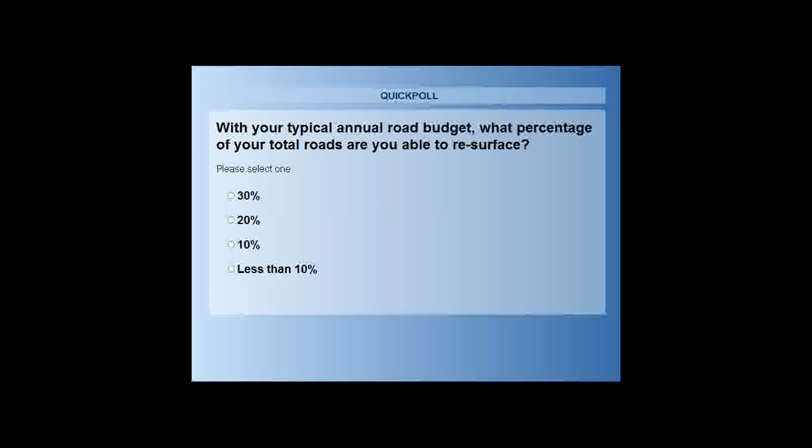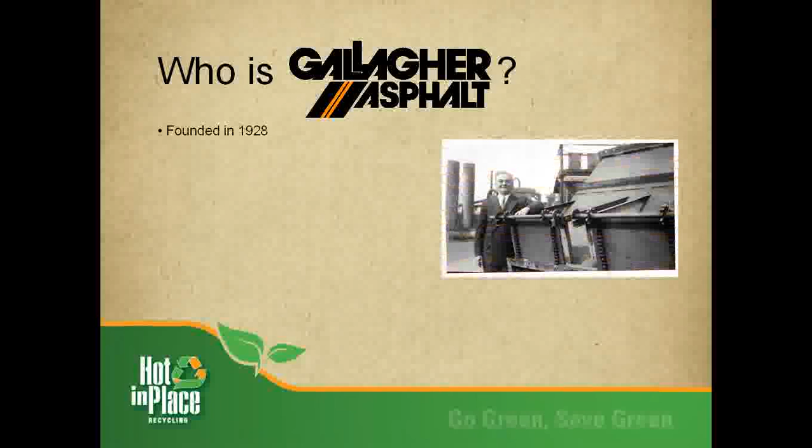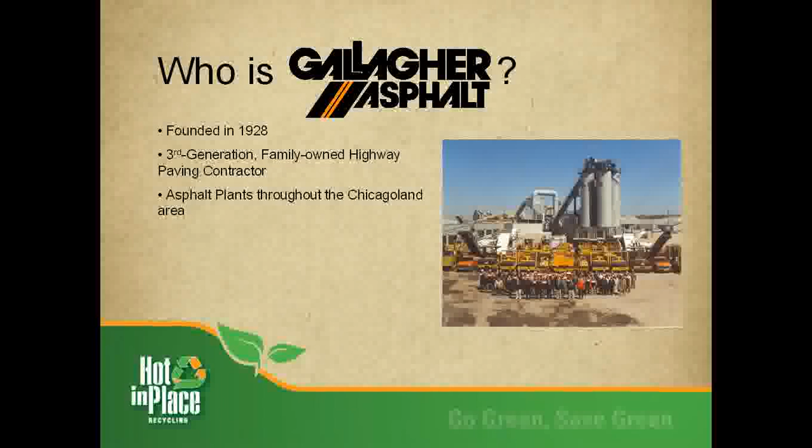Not to make this a commercial about Gallagher Asphalt, but I think it's important to know who someone's talking with, what kind of reference or background they have, so we'll keep this just a very brief part. Gallagher Asphalt in the Chicago area, where I'm speaking from, is one of the largest and oldest asphalt producers in the state of Illinois. We've been in business pushing 90 years, the third generation. There are some fun facts here, assuming you're all seeing this. There are some active organizations we're involved in, like NAPA and NCAT, Illinois Road Builders, and so on and so forth.

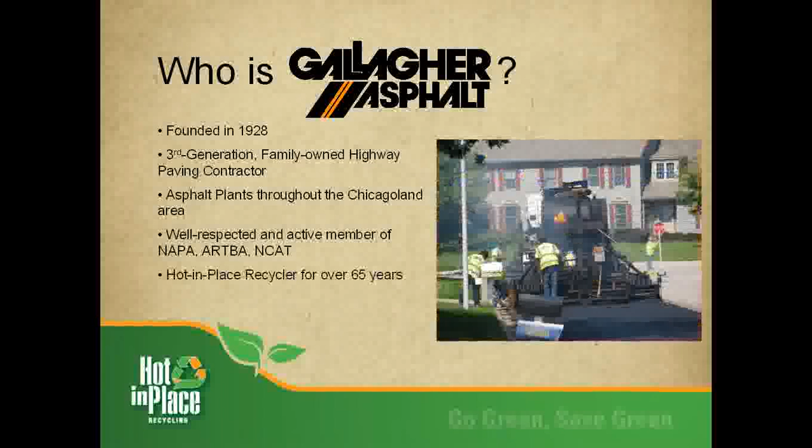The punchline I use when introducing myself or speaking to audiences is that we've been building roads for about 85 years and recycling them for about 65.

One other area I wanted to cover is one of our other divisions, Chicago Testing Labs, which in all likelihood is the oldest testing lab in the country, founded in 1912, and does full-line testing for highways, concrete, soils, and so on. These are all available on our website, along with the host of other Gallagher companies.

Randy mentioned that I was actively involved in ARRA, the Asphalt Recycling and Reclaiming Association. It's a couple hundred suppliers, contractors, and others involved in some discipline or area of recycling. It's a national organization headquartered out of Annapolis. I happen to be on the board of directors and vice president, and in a couple of months I'm about to be president of the organization.

What did Groucho Marx say? Any organization that would have me as vice president, I don't want anything to do with. But enough said there.

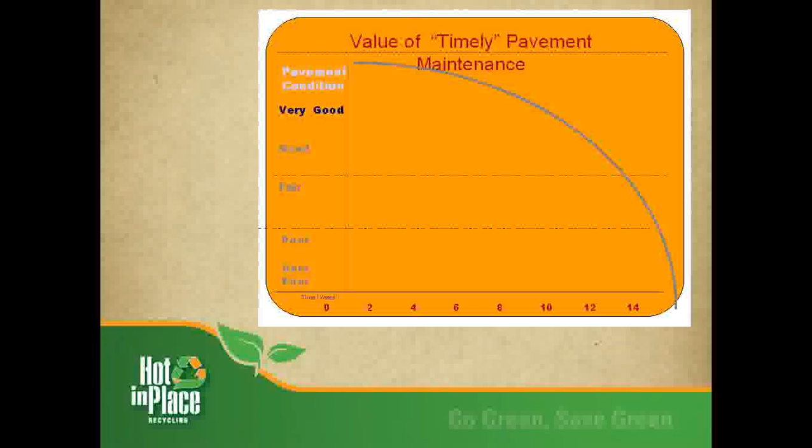One of the other lines I use all the time when I'm speaking directly to agency people is that you always have $100 worth of problems and about $65 to fix it. So you've got to be looking outside the box, looking for a different fix, and so on. This may well be suited for you. Ideally, from a textbook standpoint, where do you want to do hot in place recycling?

The textbook would say our BARM, which is a production from ARRA, our basic asphalt recycling manual, would say you want to start entertaining the thought of hot in place recycling somewhere in the 5, 6, 7, 8 year range. That's in perfect conditions with normal budgets and reasonable asphalt prices. I don't know the last time I worked on a 5, 6, 7, 8 year old asphalt road for hot in place. So in that regard, we continue to lower the bar, if you will. We are working on 9s and 10s and 11s and 12s, and we can do that.

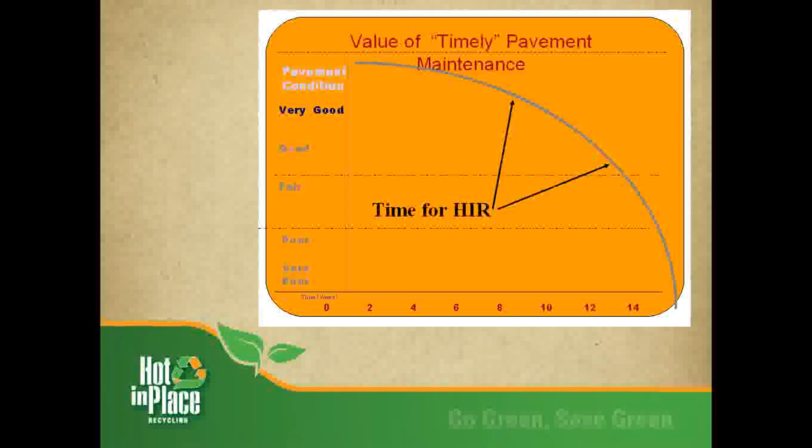I say we, I'm referring to good asphalt hot in place recycling contractors as well, not just Gallagher. You can look at an 8 or 9 or 10-year-old road depending on the customer's expectations. If we continue to lower the bar, there have to be some caveats about what those expectations are. That's very important to us as a contractor and obviously to the agency as well.

Let me run you a drill here real quick to show you on that reconstruction side what we have done historically, and then I'm going to move you through this time warp, if you will. There's a typical grind and overlay, and I think everybody has seen that and is aware of it, but let's run a quick drill here.

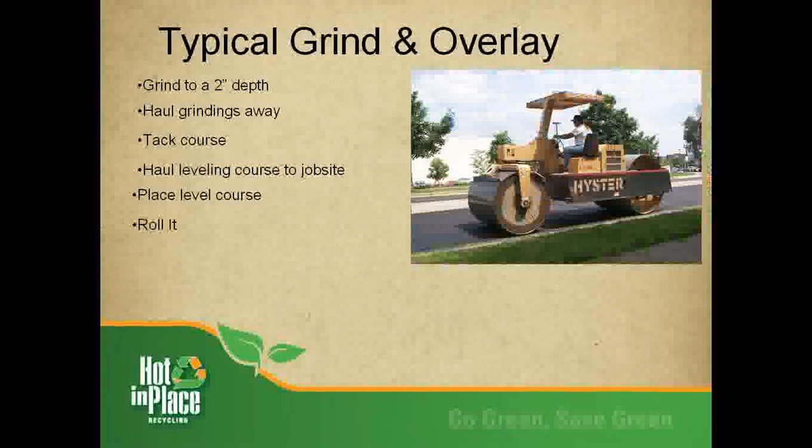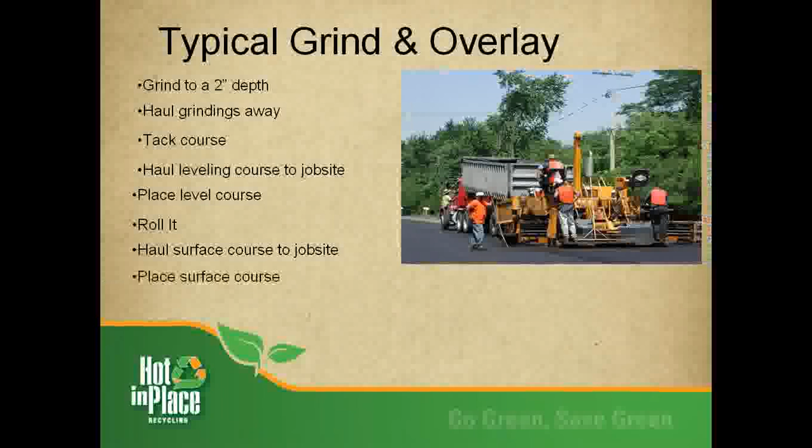I guess they have it at 2 inches here. So a typical 2-inch mill and fill is going to bring the grinder out in a whole bunch of trucks, haul all those grindings away, bring the tack course back after you've taken your 2 inches off, bring your leveling course back to the job site on trucks, place your leveling course - guess that would be more carbon footprint in there - put a roller on it, haul your surface course back to the job site, place that course, put a roller on it, put a stripe on it.

And it's done. If you pay attention, whether there's 2 people or 200 people out there, you'll find there's a little bit of humor laced through this whole thing. So I'll pause for a little laughter, although I can't hear it.

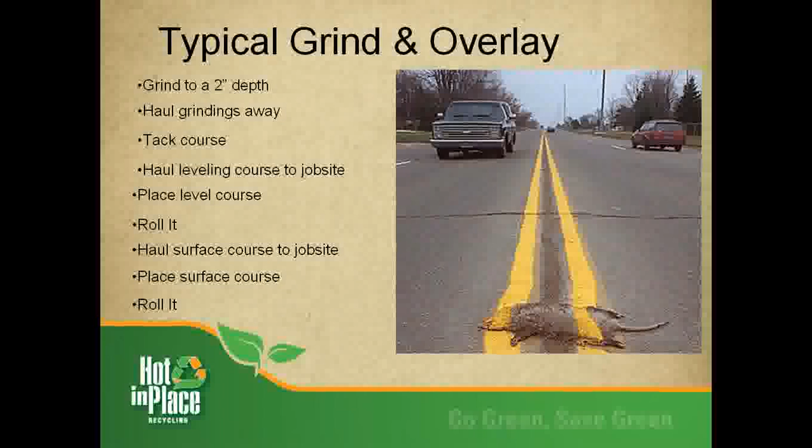That standard methodology, a mill and fill, has been around for a long time. It will be around for a good time longer. There comes a time in a roadway's life that it hasn't got the attention and it needs to be ground out and taken away. We've got a couple of choices here. Let's talk about the surface method, or heater scarification as it's referred to, and I'll compare that back to the mill and fill that we just saw.

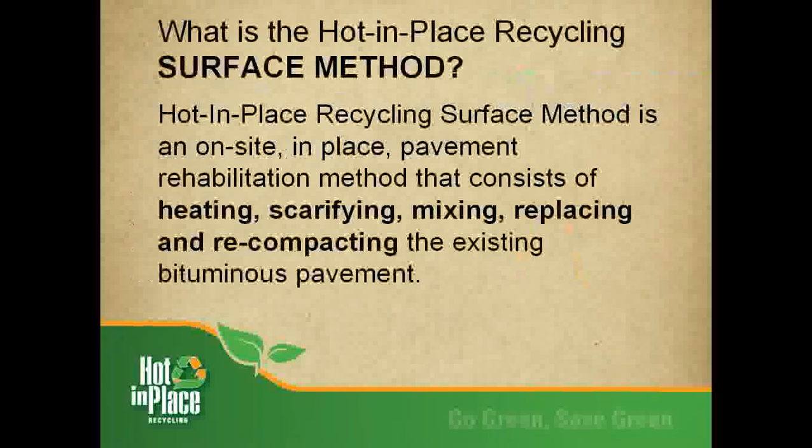I always heard that a good speaker should not read to his audience, so let me read this to you - actually, go ahead and read that yourself. It essentially says that instead of milling that pavement out, we are going to rehabilitate it in place and essentially make it a leveling course, make it ready to receive a new surface course. That's how we're going to do it here.

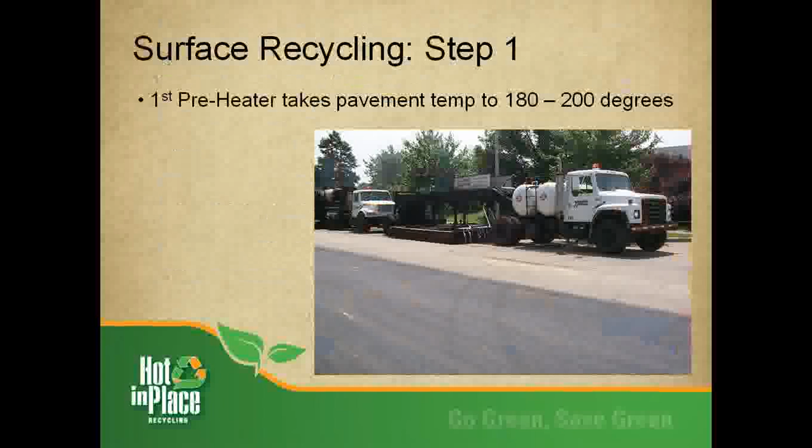The first unit is a refractory lined, propane-fired oven, and that's all it is - it's just going down the road somewhere in the vicinity of 8 to 15 foot a minute, slowly reheating the pavement. That first oven is going to take it up, as it says in the top banner, to 180 or 200 degrees. The second oven is just a duplicate of the first one. We'll take that pavement temperature now up around 300, henceforth which it came, if you will.

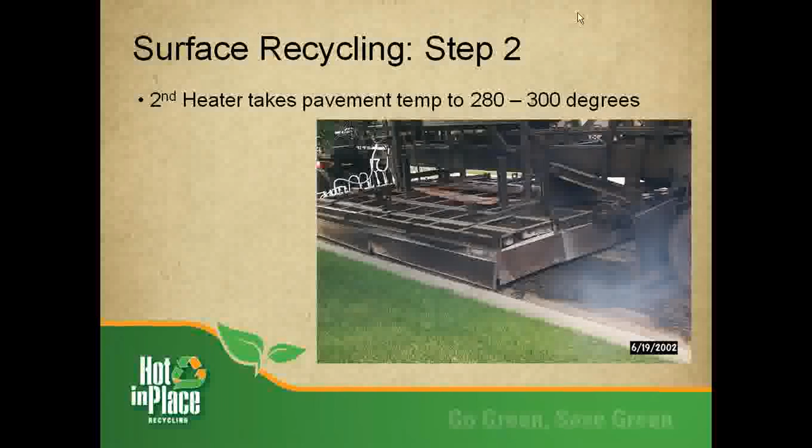300 degrees is the temperature that this material showed up as virgin asphalt when it was placed originally some years back. We've got 300 degree pavement. We are going to introduce the particular rejuvenating agent, which may vary from contractor to contractor, but we are going to introduce rejuvenating agent to the pavement.

This pavement has two problems. The two single largest problems that your pavement has is the lack of AC, or the UV rays have cooked the liquid out of this pavement and made it less flexible or brittle.

So several years into it, as this AC cooks off, you start to see some reflective cracking. And if reflective cracks are not attended to, they become more severe. The pavement essentially then opens itself up.

It opens itself up to take on moisture, and at the same time is losing some of the fines, which are very much a part of the matrix, or part of the mix that holds that matrix together of sand and various size aggregates. The fines and the oil all come together to give you your density in your asphalt pavement. When those fines start coming out, that's typically the beginning of the end.

Look at a 5 or 6 or 7-year-old road. Look over if it has a curb and gutter. Look what's laying in the pan. You see the fines laying in the pan, and that's not where they belong. They belong on the roadway. So those are the two most serious violations that happen over time to that pavement.

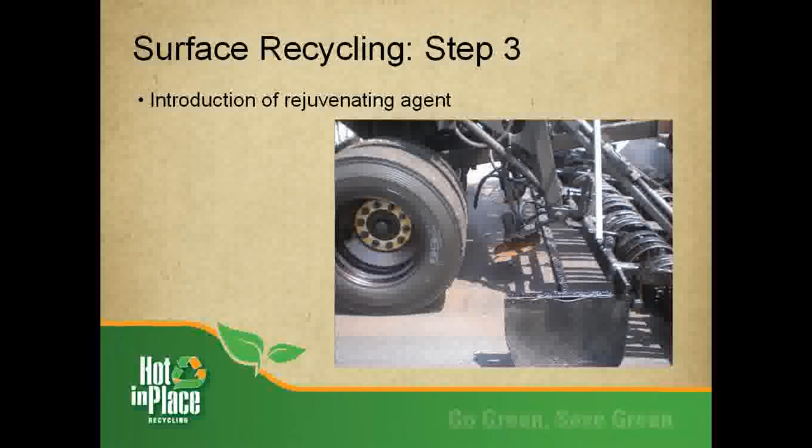We use, in this case, a polymer-modified rejuvenating agent, which my own lab people tell me will, in fact, make up for some percentage of the loss of those fines. We've already identified that we're putting the liquid back in it. We're using the polymer modification to offset some of the loss of fines.

In this particular operation, we are going to put a set of steel forks or flexible tines, after we have put that rejuvenating agent into the pavement, down into the pavement at a prescribed depth. He's in the up position here for the photo, but those typically can go into a pavement at up to around a 2-inch, and some jobs we've gotten 2 1/4 depth.

Typically, we're running at 1.5 inches. We've identified from a previous slide that this particular process is going to rejuvenate what's there. We're rejuvenating the roadway, making it ready to receive a new surface course.

So I just said a moment ago that we're typically working at 1.5 inches depth with these steel forks or tines. The reason that we do that is because the last lift typically put on the road was 1.5 inches deep. We don't want to mix the larger level or binder aggregate with the surface when we bring that to the top. We want a good steady mix. So if the last lift was 1.5 inches, that's where we're going to work.

If the last lift was 2 inches, that's where we're going to work. So we'll dictate that on every road that we look at, as any other hot-in-place contractor looks at, is different. You have to take everything on a case-by-case basis.

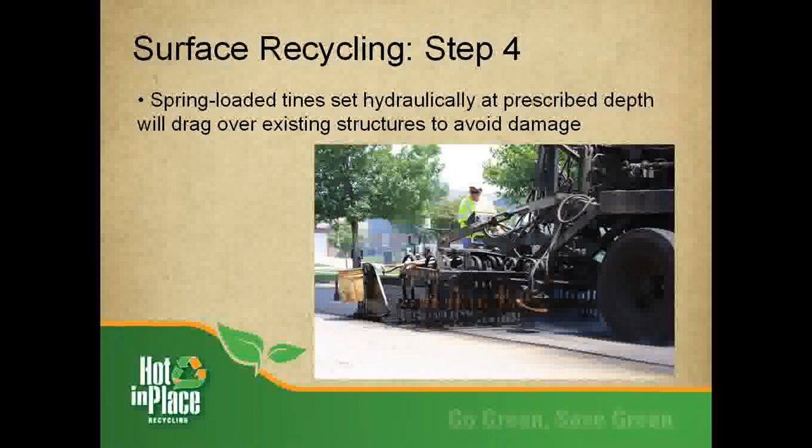A little bit of hand work, but nothing dramatic. We don't stop the operation. There's an auger right behind the tines, full-width augers, giving the roadway a good mix, making sure that oil's in it. We can do some limited profiling with the road.

If you've got too much crown, we can knock it out. If you want a little bit more crown, we can put it back. We're robbing Peter to pay Paul. The only material that we are introducing into this process is the liquid. So if you want more crown, we can do that, but we're going to take it from the shoulder, so you'll have to make it up on your finished pave.

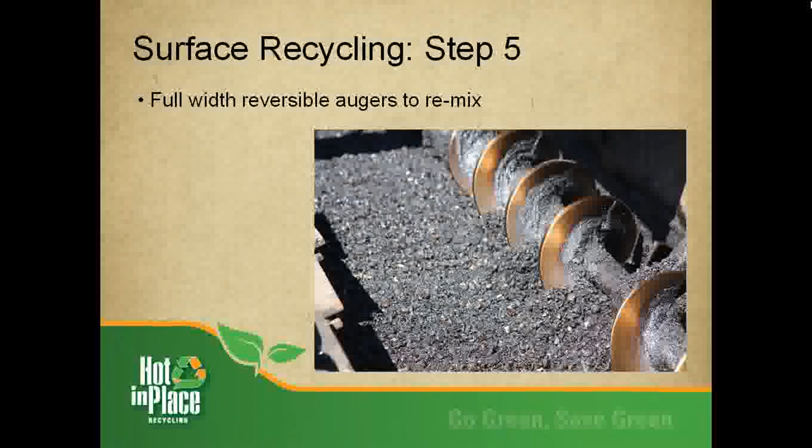Behind the mixers is a conventional paving screed. It's carrying a head of material down the road, as would a conventional paver at a job site. It's getting fed by 6-wheelers or semis, and redistributing the material the way it should be.

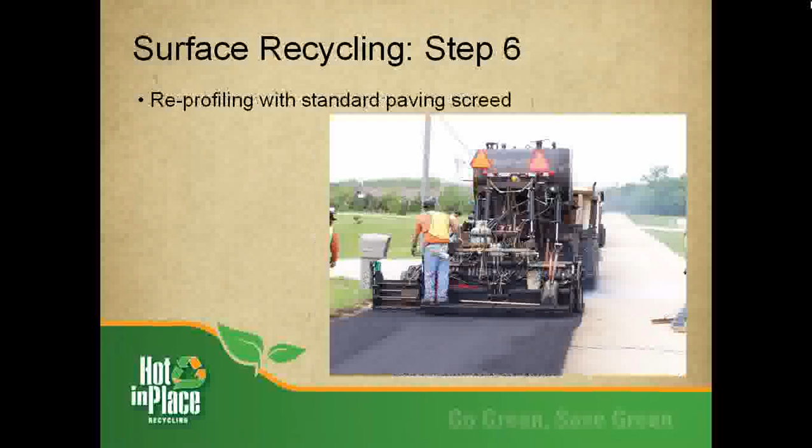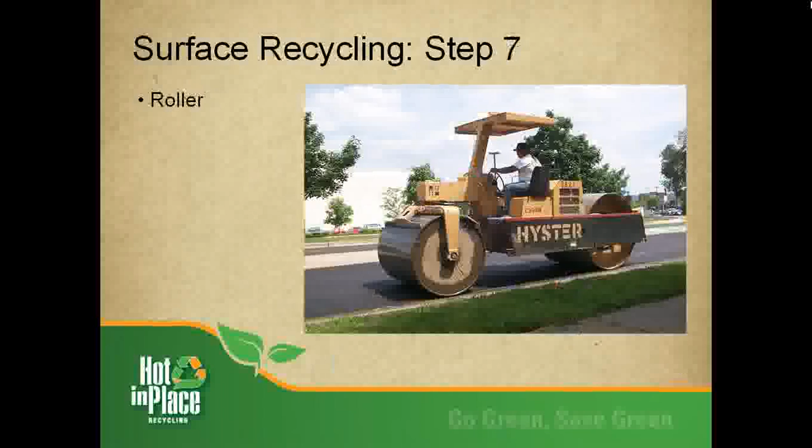Vibratory, heated, chased with a roller. When that roller passes a driveway, a business entrance, a residence, it's open to traffic. The project isn't done, with heater scarification, but the roadway is open to traffic. We're down now, one would have to assume, below 150 degrees where a roller shouldn't be on it.

So my point here is utilization of flaggers on this project will be lane restriction and not lane closure. That's a big deal. I'm going to show you some numbers later that justify the cost of hot in place over mill and fill, and that's without using user delays. If you threw user delays in there, it'd be astronomical. But we have minimal interruption to the motoring public. We don't have lane closure, just restriction, and that's appreciated by all.

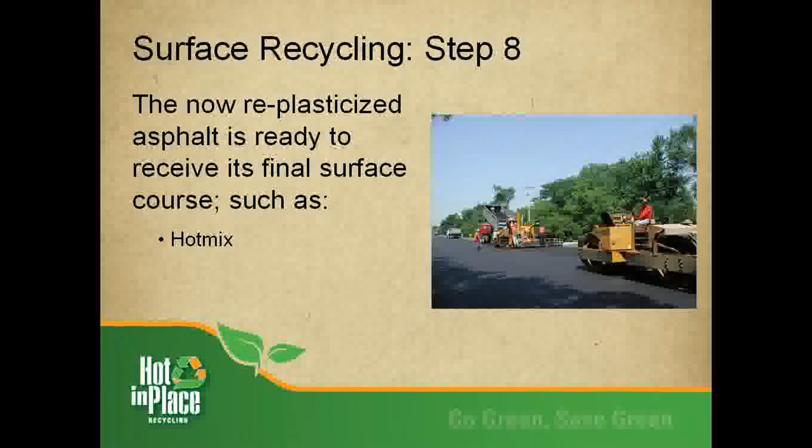We're finished with the hot in place recycling process, and now if it's here in the Midwest or in our backyard, we may well come out and do the surface course of the paving, or as we move around, we usually leave that to the local paver. Within the three technologies under the hot in place heading, there was another process called surface repaving, and that's a turnkey operation. They don't have another paver come in and do that. But anyhow, the hot in place recycled asphalt is now ready, in this case, to receive a new surface course.

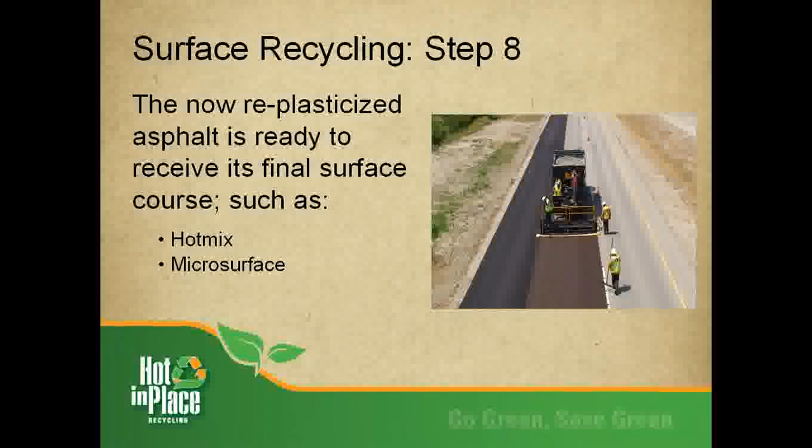If you remember that slide, where does it fit in? What we are seeing a lot more of, that is budgetary driven, is less expensive surface courses. Not everybody has the budget for a 1.5 or 2-inch overlay of hot mix. They may well go with a micro surface, a slurry surface. And that, I think, comes back to customer expectations.

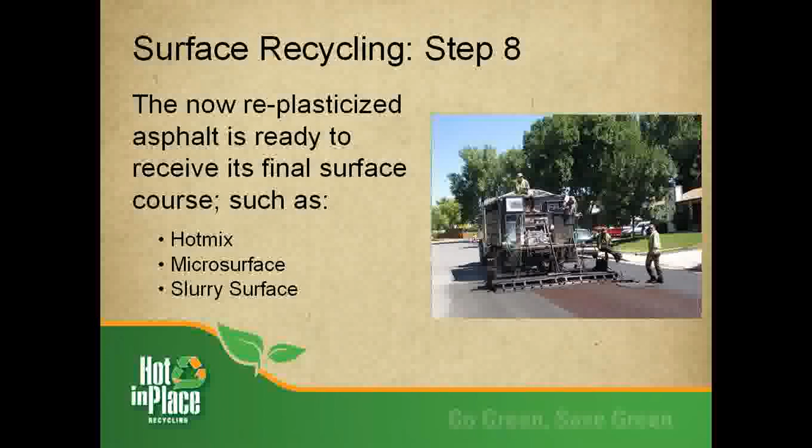What are you looking for? You're obviously not going to get the longevity out of these less expensive surface treatments than you would from a structurally introduced product like asphalt at 1.5 or 2 inches. But it may well fill your bill. It certainly will be bang for your dollar and get you to where you need to get to. And that's obviously going to depend from region to region as to what kind of life you get out of the less expensive option. But they are very much part of the ball game now. Make no mistake about that.

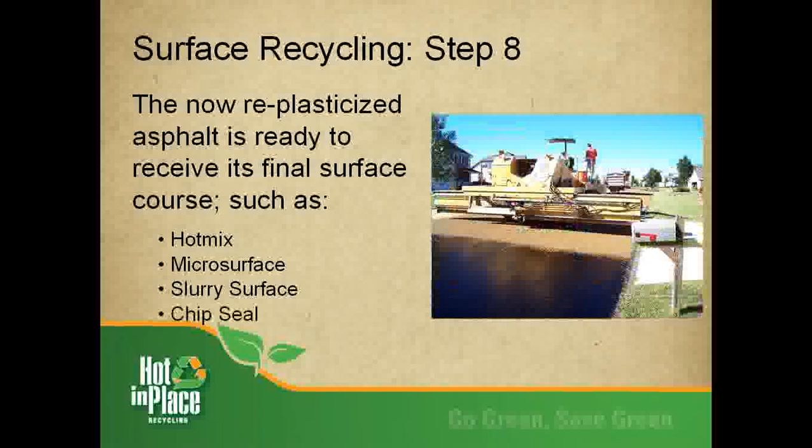Chip seal is kind of an old country thing. We see a lot more chip seal, it seems, every year after year. It's a good sell. Although minimal, it does have some structural value. But chip seal is moving downtown. We have worked for the city of St. Louis County, and they use a lot of chip seal right down on their main drags, main streets in town. It's quite a product if you get the right emulsion and the right rock.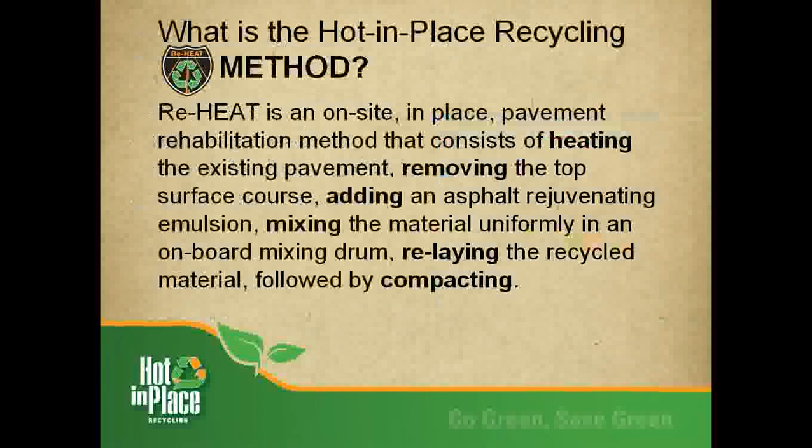For years, people have asked us, why does it have to be covered up? Because we think we're returning the road to a certain percentile. It's not a virgin mix design. There's things that happen to the road, and we feel better about it. I think there's longer life to be gained off the roadway on the heater scarification with the surface treatment.

This process, reheat, is going to retreat the road via heat, but will not, in fact, require a surface treatment of any sort. So this is where hot in place recycling has evolved to. We've been playing with the idea for a good number of years, and finally have gone ahead and put the equipment together that will do the job.

The basic difference—I don't have a lot of pictures in this PowerPoint—but the basic difference with this unit is we are picking the roadway up and putting it into a drum. The hot in place asphalt heater scarification recycling is in situ; that aggregate actually never comes off the roadway. This process will, in fact, with a moldboard, dial in at a prescribed depth of 1 inch, or 2, or 3, and perhaps beyond.

Since we're leaving a finished product, it's going to be dictated by the surface treatment that was last put out there. So if there was 1.5 or 2 inches, that's the depth this piece of equipment will work at. Rather than using the scarifiers or the tines, it'll have a preheater.

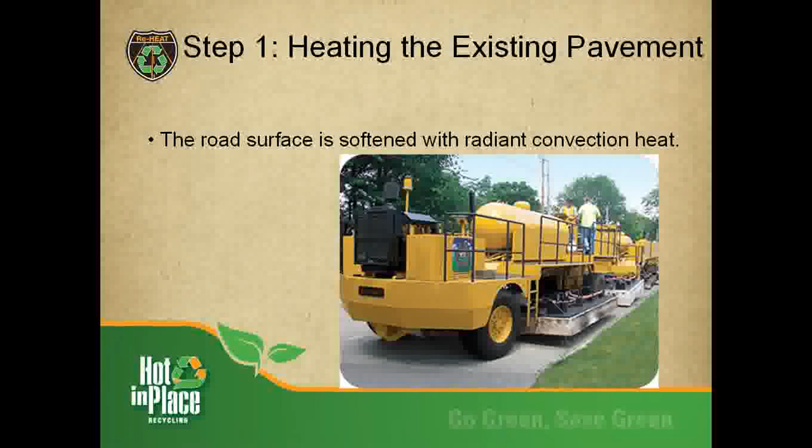I think that is beneficial - less carbon footprint, less equipment, less fuel, and giving us the heat that we need. So we have a preheater out in front, just a little different configuration, that essentially will take it up to that 180 or 200 degree level.

Pretty good picture of it there, I guess. I don't have a good picture of the drum. The preheater's out in front. Stay with me, Aaron, go ahead.

So anyhow, we've got the pavement that's softened, we've got 180 degrees. The process unit's going to come along - it has another oven unit on it that's going to take it to the next 275, 300. Again, we're at the temperature where this material showed up when it was virgin. At 300 degrees, we can start the process.

So I don't have the forks or the tines. I'm going to drop a moldboard or a blade down to that prescribed depth and feed this material into the mill, or a paddle wheel of sorts, that's going to take this into the mixing drum.

The mixing drum has heater elements. One of the issues, particularly early or later in the season, in the Great Lakes area, is heat loss. It doesn't take long - even in a standard paving operation, you all know it doesn't take long for the heat to come out of that pavement.

The mixing drum here is similar to what's going on in the plant outside the door behind me - it has a heat element, and that's where the oil goes. I didn't tell you before that the rejuvenating agent we were using is an emulsion. I apologize - we have gone to an oil here.

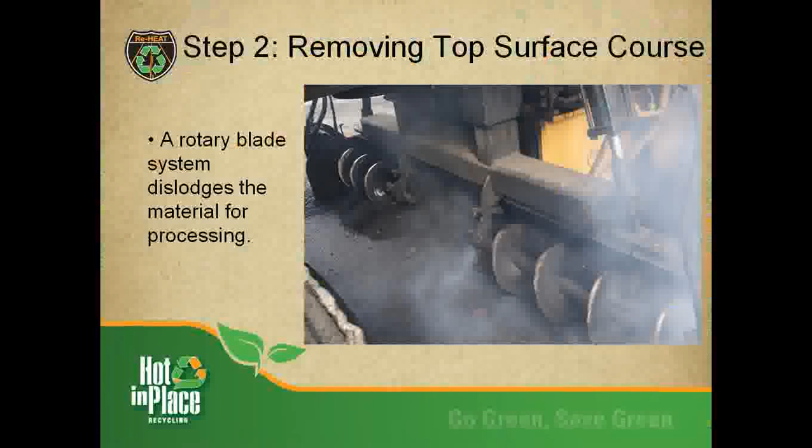So the oil is injected in the drum, the heating element goes on in the drum, and then it's going to come out in a windrow. There's some good pictures - it's going to come out in the windrow out the back side of the drum, that will get augered across the mat, and the paver right behind that.

I said I had limited pictures here. They get augered - the freshly rejuvenated material gets augered across the mat, and it gets fed to the paver, and the paver puts it down the same conventional method as if it were being fed by, again, a six-wheeler or semi.

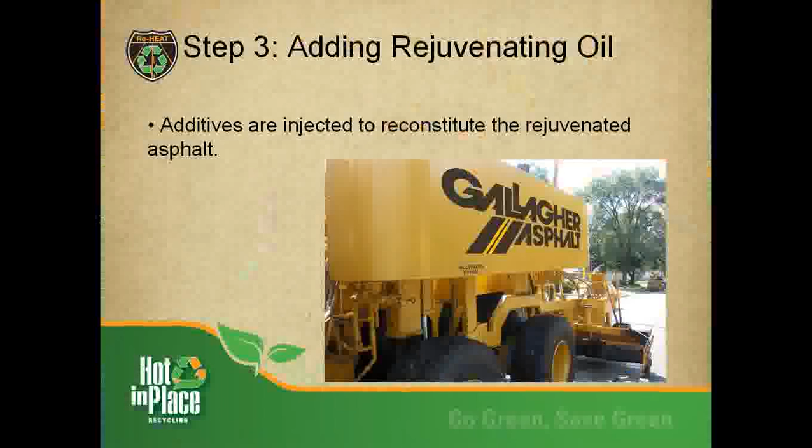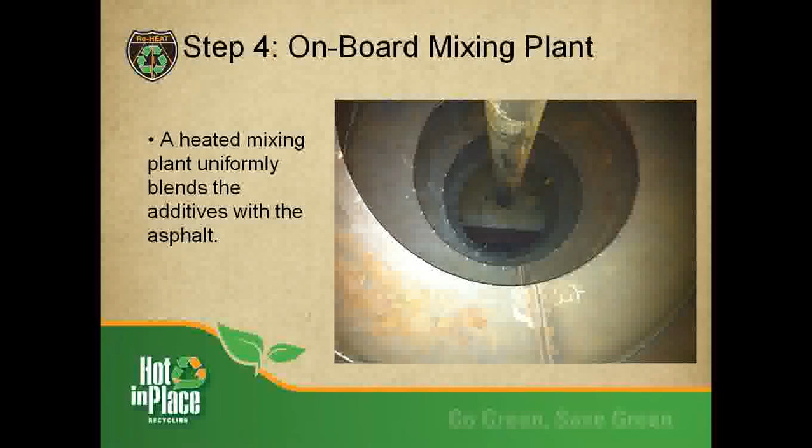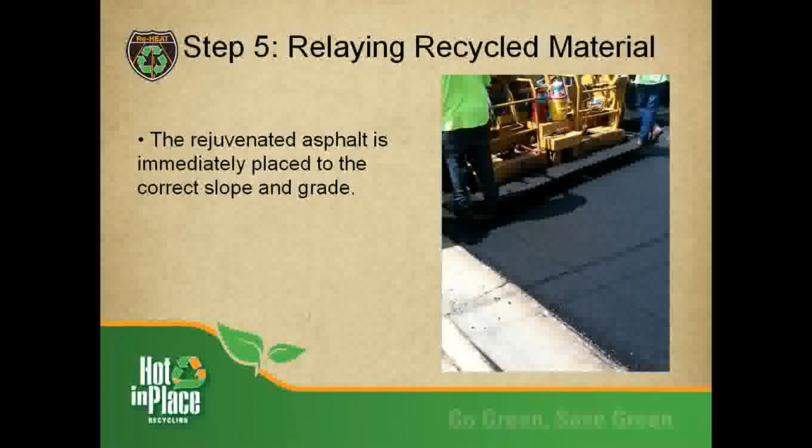A pretty good looking mat, curb and gutter situation. That's the other thing, you don't have to worry about curb and gutter. We're putting it back at the same height or elevation that this road was when it started.

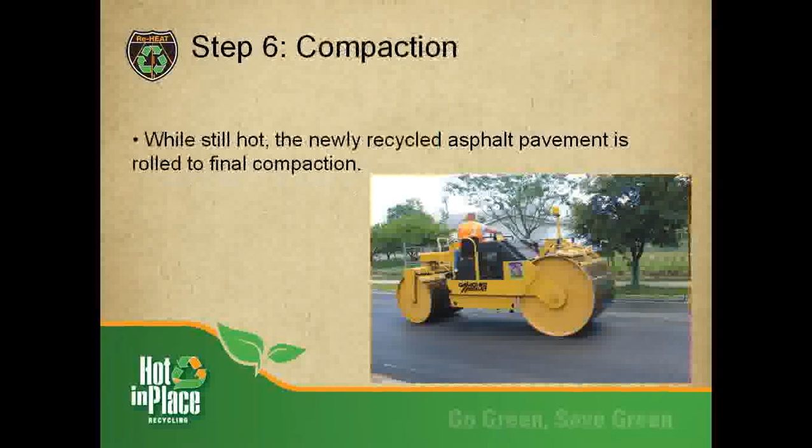Put a roller on it, it's done. Nobody's coming back to pave behind it. Nobody's going to put a micro or chip or anything else. Open the traffic.

We're leaving this tied up a little bit more. With heater scarification, the traffic's back on there immediately. We're going to hold people off for 5 or 10 minutes, but certainly no terrible interruption at all.

There's a fun fact. Every road's different, but we have kind of a standard application rate of around 1/10. There's a science here, there's methodology here. A back-end guy on any good recycling crew is going to dictate the application rate.

Even if you take cores, send them to the lab, and it says it looks like it's going to need this, it doesn't always come out that way. It's usually a constant variation as they go down the road as well. We'll give it all we can, that's what we need to do.

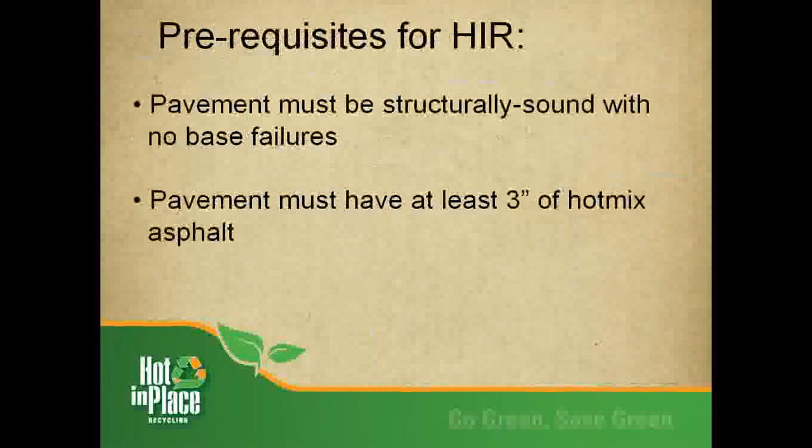Prerequisites for HIR, as I think I said earlier, pavement has to be structurally sound, no base failures. That's not to say you can't go out and fix some, but for the most part the road needs to be structurally sound, and those areas that aren't need to be fixed. And you need at least 3 inches of asphalt to work with.

Types of asphalt pavements or candidates. Here's some pretty ugly looking roads. But again, everything's on a case-by-case basis. I'm not sure I agree with all these pictures.

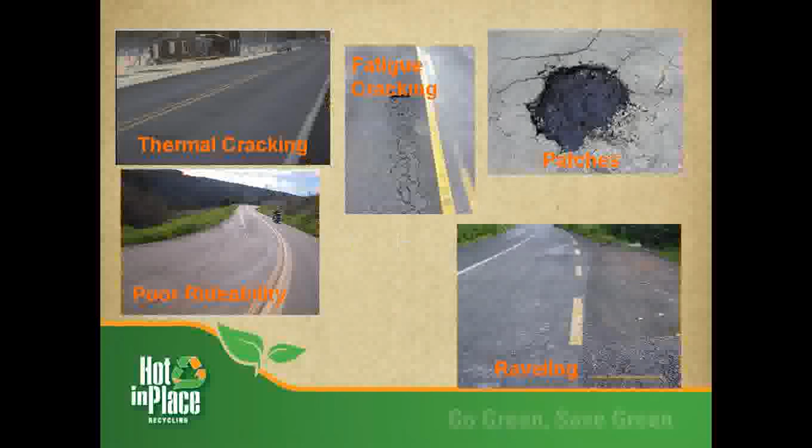If you have a contractor that's going to come look at entertaining the thought of doing some hot-in-place recycling, have them come out and look at each road, take some cores, do some proper testing, so on and so forth. I don't think these are good candidates, and I think that's why that picture was put up there.

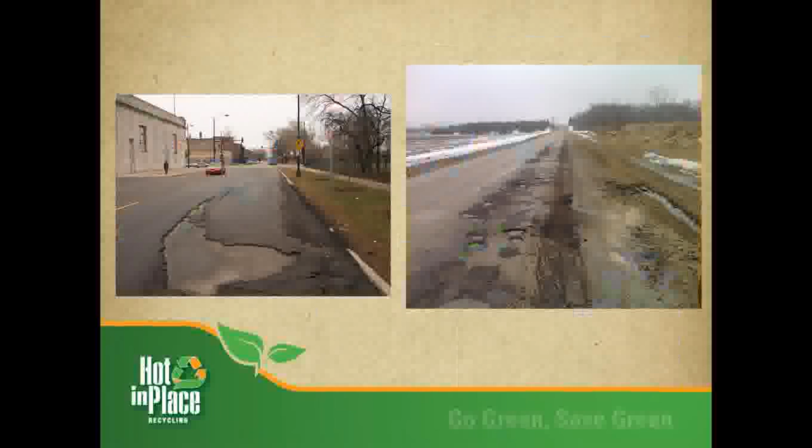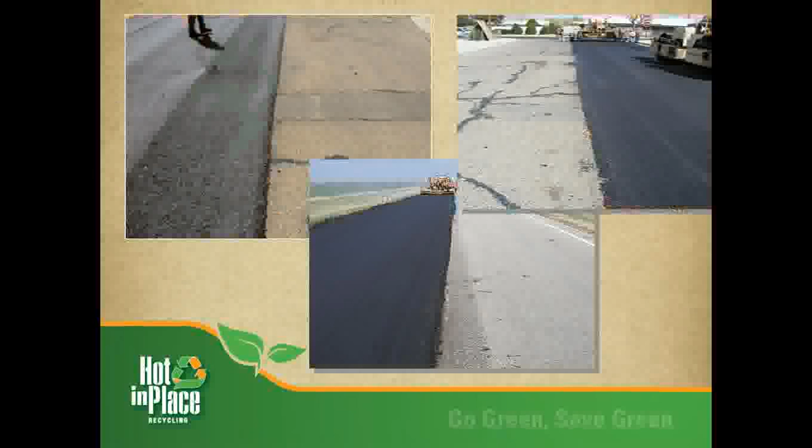They have utility cuts, crack filler, cold patch, and there's also a pretty good picture of the before and after, the bottom center picture. That's a pretty good looking mat.

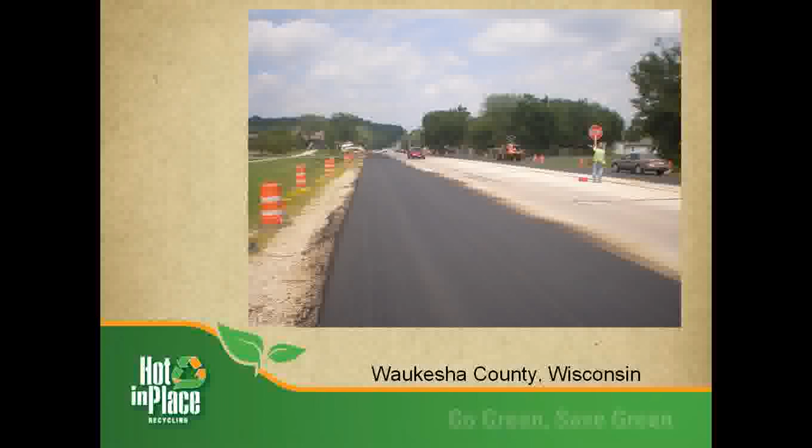Here's some job pictures. These are heater scarification pictures up in Waukesha County, Wisconsin, a long time customer of ours. There's some good before and after.

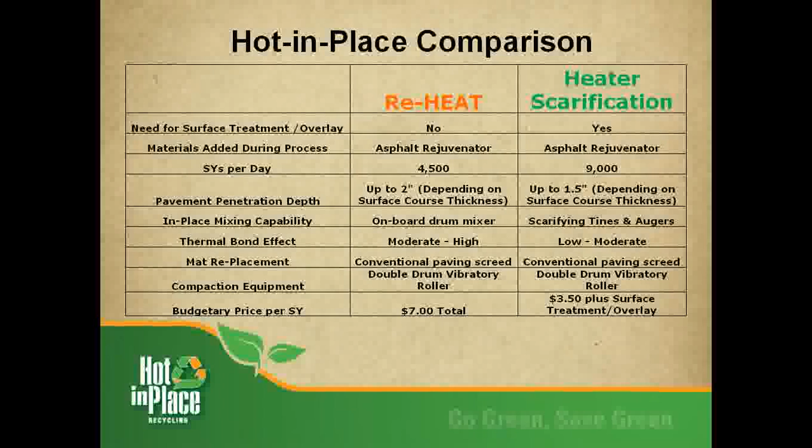Again, if someone has the interest or is more concerned, they know how to get a hold of us or ARRA or any good contractor. We've got some pretty extensive websites that are available. This just kind of very simply lays out the differences between the two processes, and it gives you a ballpark figure down there at the end.

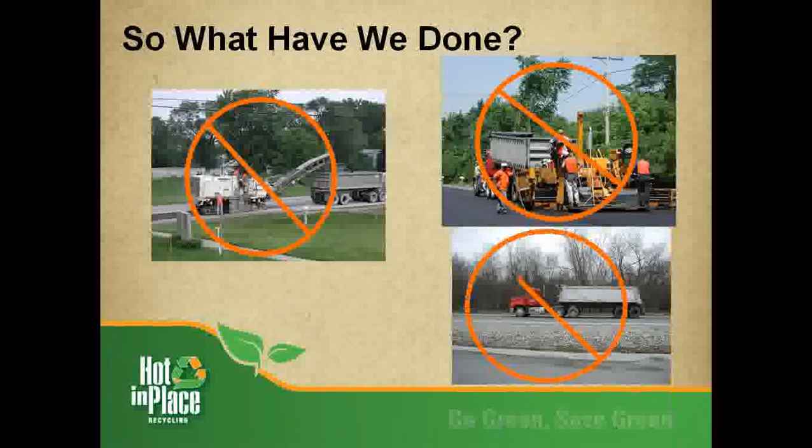So what have we done? We've eliminated grinding, eliminated that intermediate or level course, we've eliminated a lot of trucking that goes with it. It's carbon footprint, I guess, is the buzzword today.

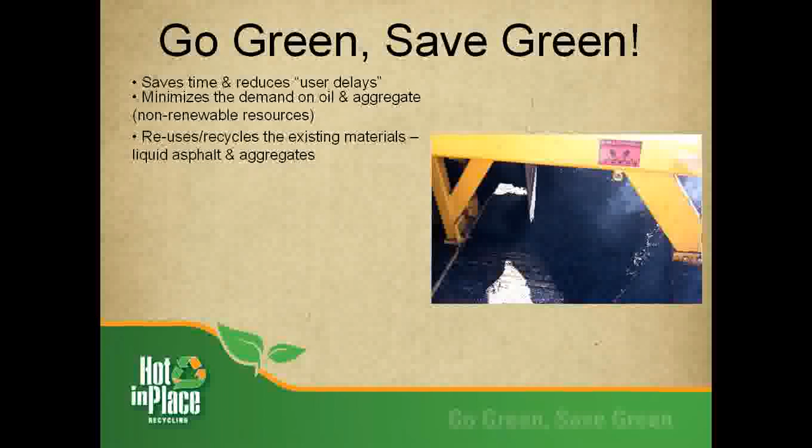So here's a list of the good things that we've done. User delays - you just start talking about that and more, but we don't figure that into the equation, but it's very much part of the equation in my mind. I talked about that earlier - use what you've got, use what you own.

I think that's Gallagher's milling machine when we're saying not to use it, so it's kind of a double-edged sword.

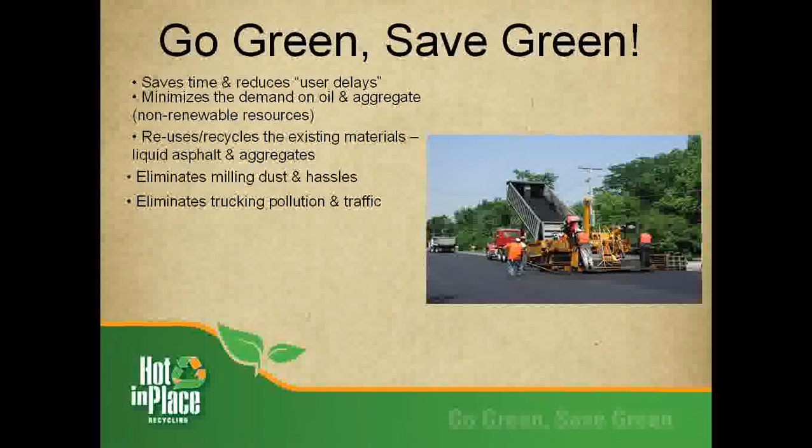Less carbon footprint. The heater scarification process, the reheat process, will reduce carbon footprint versus the alternative method we're looking at now. That includes the plant, the blending of virgin material, the trucking back and forth of the multiple layers, the milling machine, the trucking of that. The carbon footprint is reduced by 62%.

That's huge. I always say that nobody's interested in going green, saving green, doing good for the environment unless there's a price tag attached to it, and that's just the God's honest truth. Recycling makes sense, but show me a saving, show me some money, show me what's in it for me, and then we can talk about the 62%.

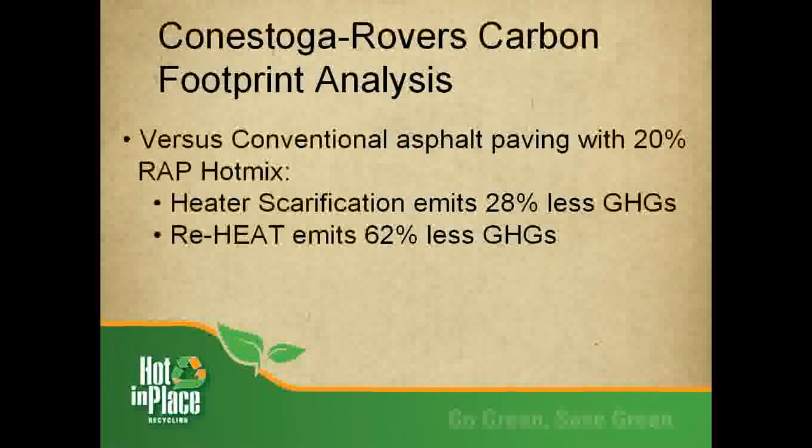And we're about to show you that. There's quite a potential dollar savings in recycling. We have a copy of that study published that came up with the 62% number, and again, that's including the plant and everything involved in one methodology versus the other.

Rejuvenator study, no, I don't think that's available. If you want to see it, we can talk about it. But here's where I think you want to get to.

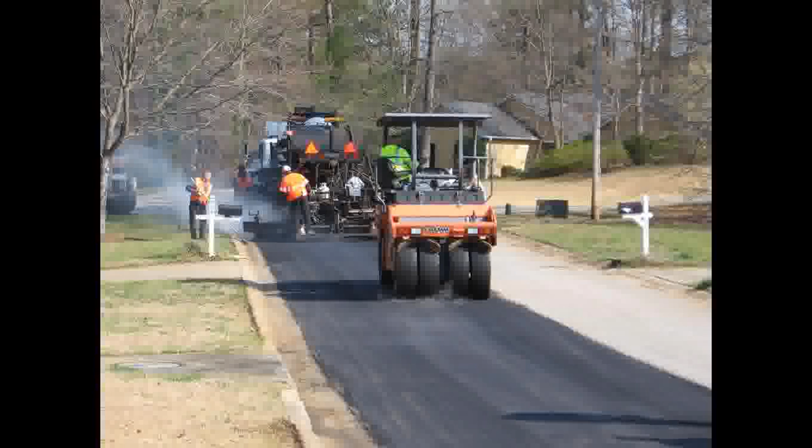Rubber tired roller, sometimes it appears, sometimes it doesn't, depends on the specification. We can get good compaction and density with steel drum vibratory these days. And when you're traveling, if you don't have to have another piece of equipment, another operator, another fuel eater, that helps, if we're able to achieve and meet customer expectations without it.

That's the emulsion, you see steam coming off the emulsion. You all know that emulsion is delivered by water, that's the steam cooking off of it. It's typically as smoky as we get.

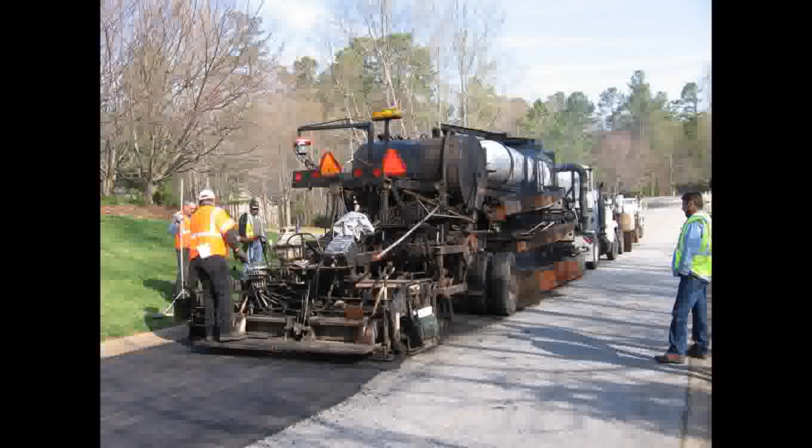Got some other decks folded up there, coming through a pretty high-end neighborhood. Steam. Pretty good looking matte finished product, unfinished product that's going to get a surface treatment.

Typical roadway, good hot in place recycling candidate, structurally sound. Good asphalt, good thickness mat, good thickness of the mat.

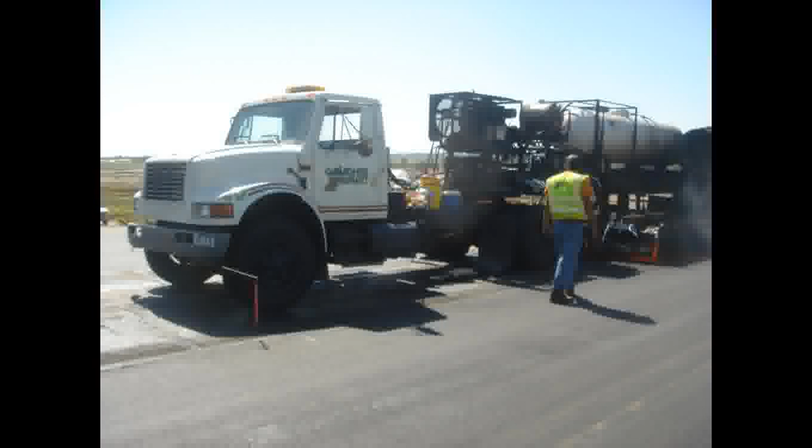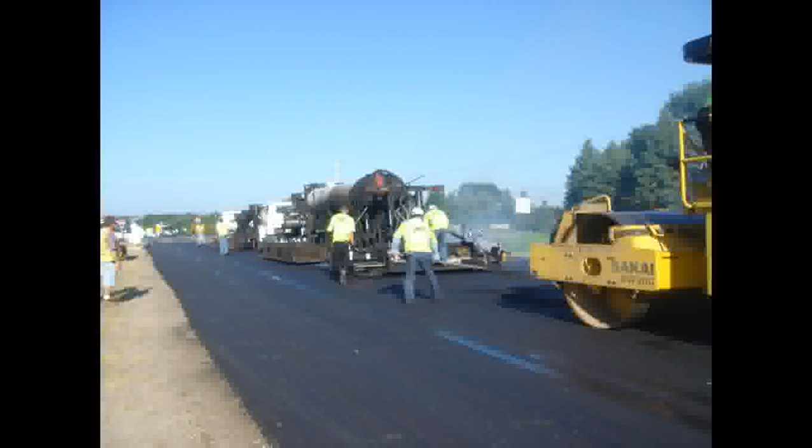Semi-finished product. You see the crack filler there, it looks like she's bleeding a little bit.

And ultimately hit that with the oven again, cut that right off. That's a pretty good looking mat before and after. Waukesha County, Wisconsin again, it's a pretty good looking mat. That's his new level course, not a finished surface course, that's his new level course.

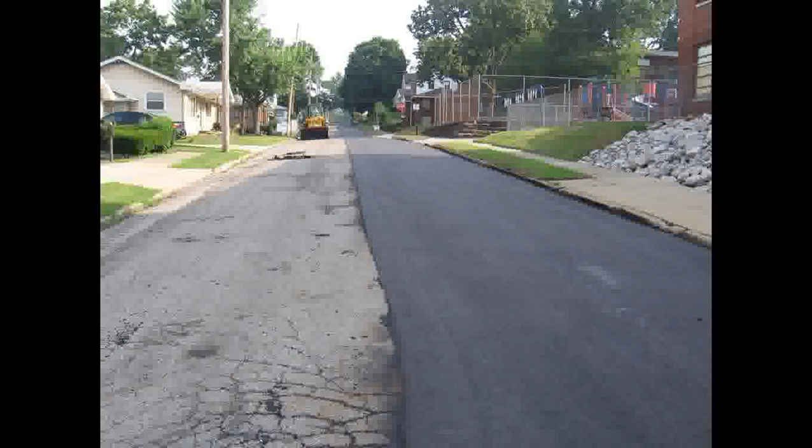I said we continue to lower the bar. If you remember that performance curve I had before, 5, 6, 7 is textbook to do hot in-place recycling. Well, this isn't 5, 6, 7.

As I said, we continue to lower the bar. On a 1 to 10 rating, or a pavement condition index, typically we were doing hot in-place recycling, heater scarification down to the 5s, 5, 5.5. Over the last several seasons we're down in the 4s now, and 3.75. Again it depends on customer expectations, but we continue to lower the bar because the money is not there.

They don't have an alternative. They're looking to build a bridge, and you have to do something to the roadway. Look at this roadway here, before and after.

Same road, pretty good looking stuff. That looks like a finished mat, and that's going to receive, I think they'll put 3/4 of an inch overlay, ultra thin. Good looking mat.

Manistee, Michigan, small community up on the lake on the west side of the state, a regular customer of ours.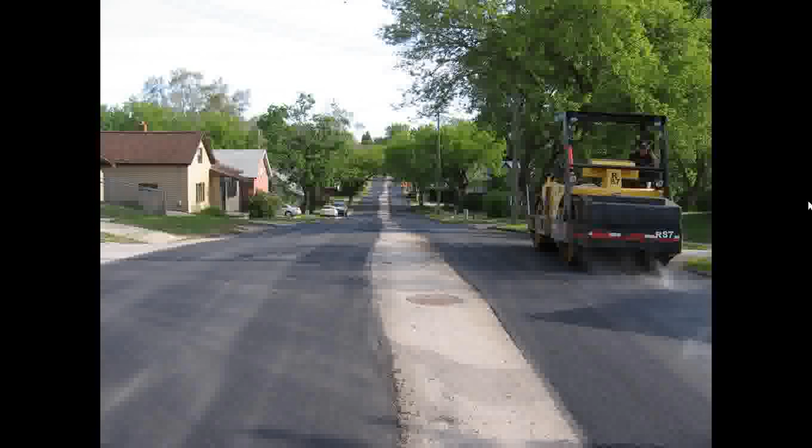It looks a little open grade there on the center line. I think we lost a roller there someplace, must have gone for a drink of water, but we'll get that tightened up. There it is, looks like you got a drink. We're gonna have to make a third pass in that road.

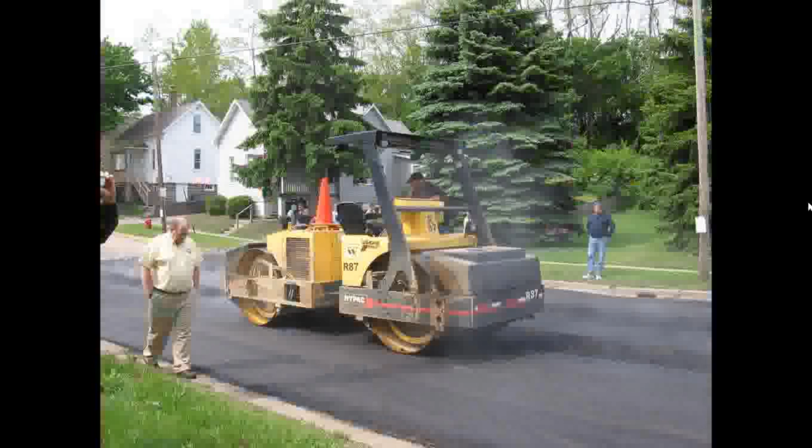That was the mayor of Manistee, Michigan.

I think we're close to an hour. If I had to pull out some common denominators here, one I started with in the beginning, is that I know you all have $100 worth of problems and $65 to fix it. You know what you've got out there on the roadway. You've got, for the most part, good aggregate that has oil on it. Don't be so fast to give that up. Everybody says, oh, there's a ton of RAP laying around. There is a ton of RAP, but that's a valuable asset. You've got a pile of it out here that we will go through, we will use. It's valuable to us, I think it's valuable to you.

So take a look at whatever discipline they are. The one I'm promoting today is hot in-place recycling. It's about holding your program together, getting more miles for less money, getting some things done that you wouldn't be able to do otherwise. You have to think outside of the box in these particular times.

This isn't the end all. I always tell people hot in-place recycling is a size 10 shoe. Road construction is a big shoe store. This is a size 10 shoe. A good contractor is not going to want to put your size 8 foot in it or try to get your size 12 foot in. This is size 10.

We're happy to come out and take a look at a guy's road, his inventory, or what's on the horizon for 2012, and see if he hasn't got a size 10 road out there. If it's a good fit, structurally sound, got plenty of material, 3 inches of asphalt, it's good to go, and we meet your expectations. This is a viable alternative to mill and fill that can save you a good amount of money.